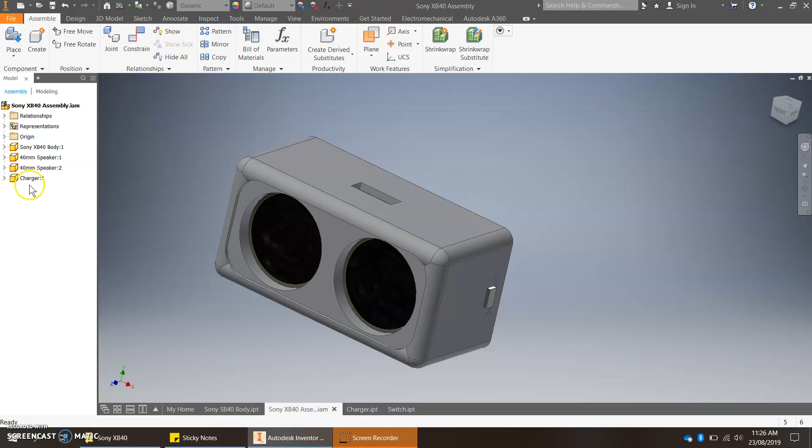So I'll start with deleting out all my parts and pieces and getting it back to the basics. First off, make sure that all your files are saved in the same folder. So from SEQTA, download the charger, the battery, the speaker, and the switch, and put them all in your folder for your work.

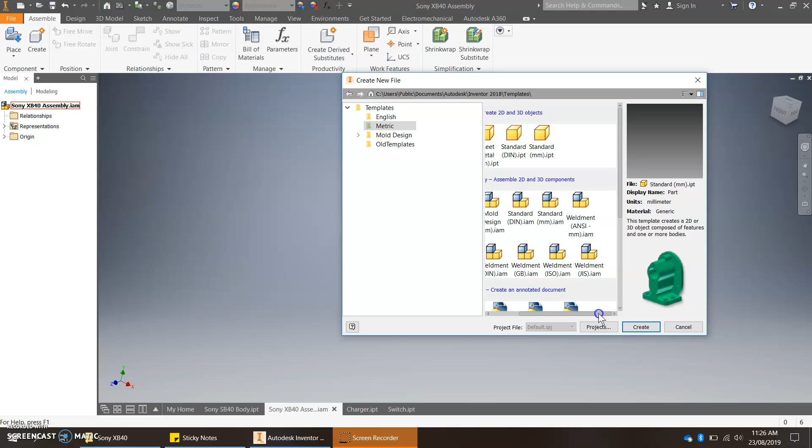Now, we'll start fresh with another piece. So you go File, New, Metric. You want the standard millimeter assembly, so Assembly, Standard Millimeter, and click on Create.

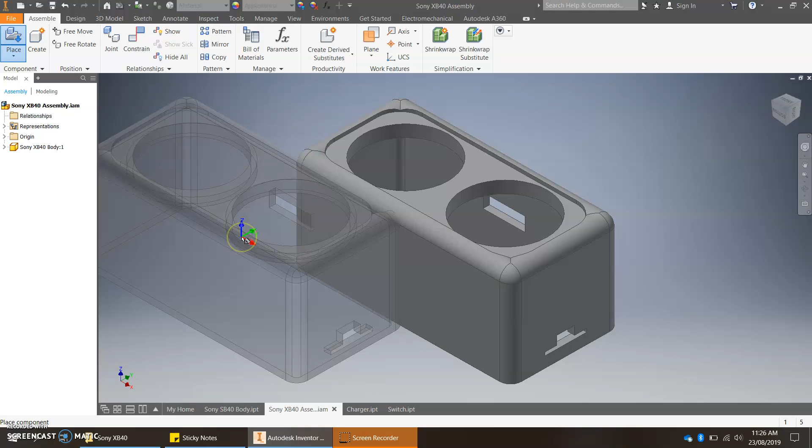Once you're there, you'll click Place. You'll load in the body. Hit the Escape key to stop making more. Rotate your view - remember, rotate view is Shift and hold your mouse wheel down.

Place. Let's next add in the speaker. So I'll click once, twice. Place in next my charger. Place a switch. Okay, when you're done, you hit Escape.

The first part you need to know is called Constrain. So when you select this tool, you're telling it basically what you want it to do.

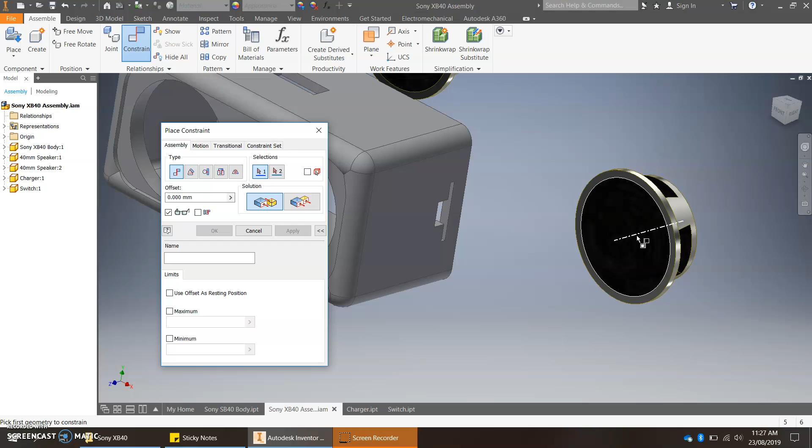First off, if I zoom into my speaker, make sure that you move till you find the center line of the speaker selected - so we're not clicking, we're just moving our mouse. Now I'll click my mouse once, that selects the center line. Move to the center line where you see the center line of the speaker hole, not the edge, but the center line. Once you have that, click on it.

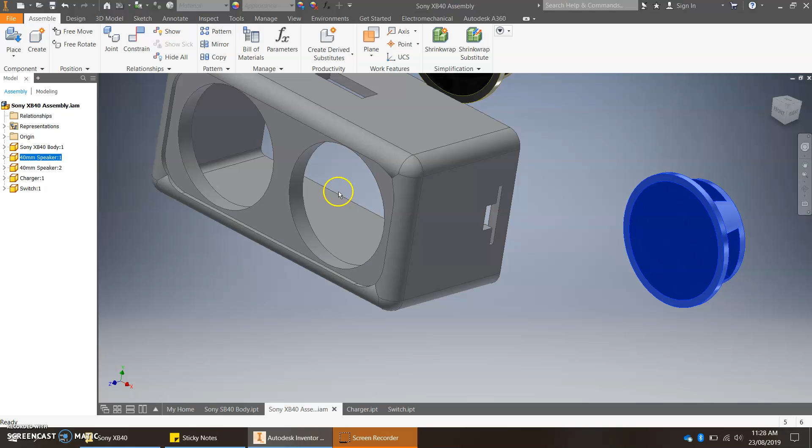If it doesn't pop in the way that you like it and it looks funny, what you can do is click on your item, then click the free rotate tool. Make sure it's rotated till it's kind of similar to what you want. So I want it to look kind of something like this in my speaker. Okay, you click the Escape tool.

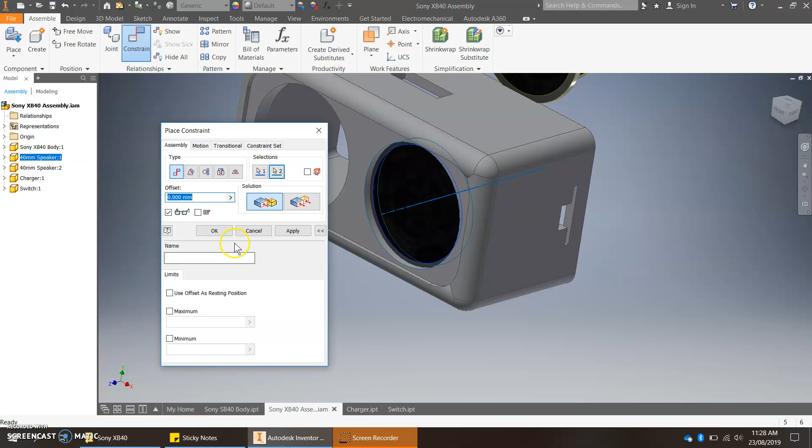Now Constrain - grab the center line of the speaker, the center line of the hole, and then click OK. Now notice once that happens, it's centered in your speaker, but it can move back and forth.

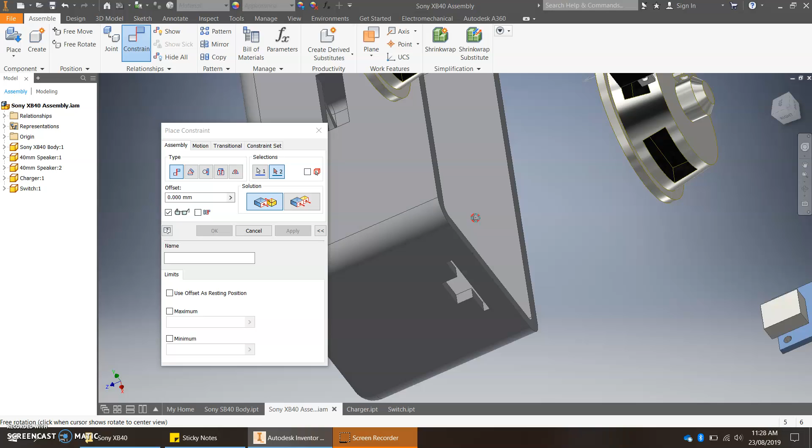Your next step is to click Constrain again, zoom in, select the surface of the speaker that you want to attach to. So if I want this front surface here, I'll click that, and I'll use my rotate tool - Shift and the mouse wheel - and I'll zoom in, and I want to touch the back of the speaker part here. If I click OK, you will now see by dragging this around, it's attached.

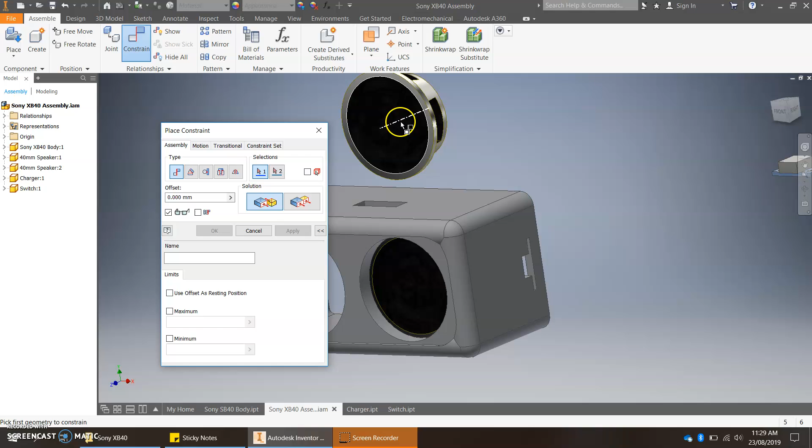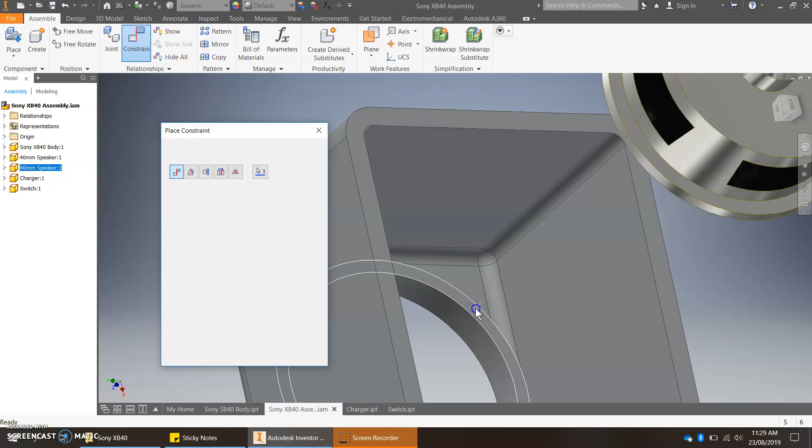So we'll repeat again with this one. Constrain, make sure you select the center line of the speaker, the center line of the hole, and click OK. Drag your speaker back, click Constrain, select the front face, make sure you get this little arrowhead, then zoom around, select the back wherever you want it to attach to that surface, and click OK.

Let's move next to this guy. So I'm going to use my free rotate tool, click on my piece, rotate it to kind of how it needs to look - something like this.

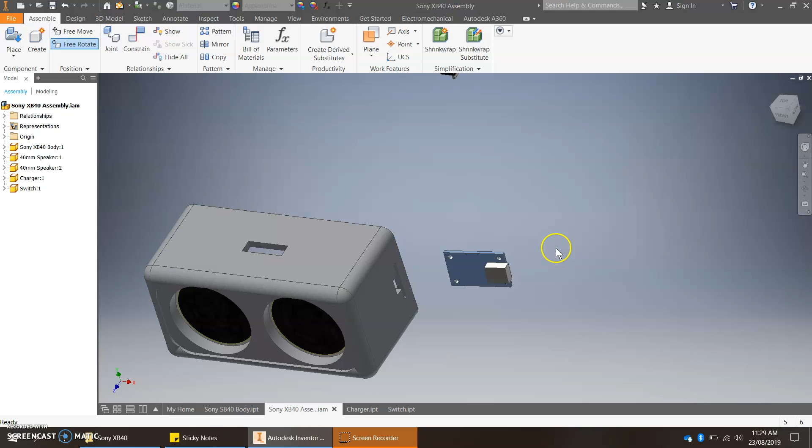Click Constrain. Okay, I would like the back surface of this here to touch the inside surface of this part. Click Apply.

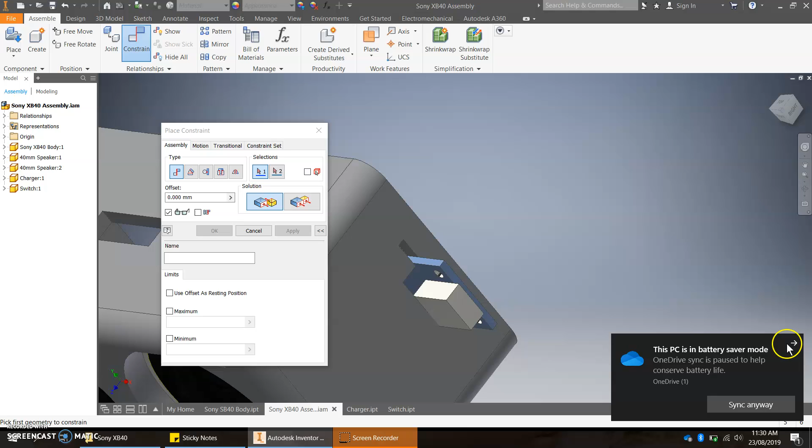The next tool I want to do is select this surface here, the top edge of that bump, and the bottom edge of this surface. See, now it looks correct. Click Apply. Now I would like this surface to touch that surface, but I want them flush.

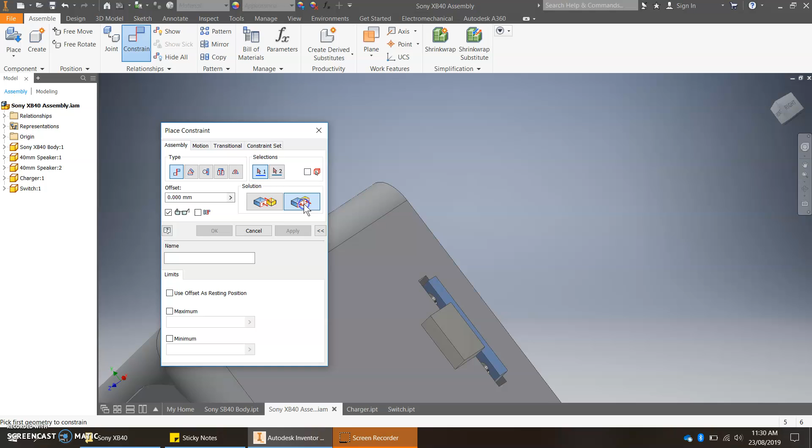So I'm going to switch my tool, click this one, and click these two surfaces. Click OK, and you'll see it's attached inside my work.

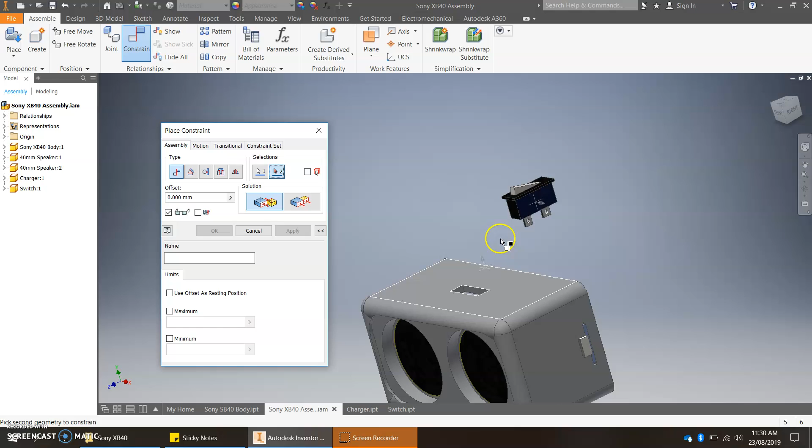Okay, next up, let's work on the switch. So I'm going to go Constrain tool, select this surface here. I'm going to zoom in and select this surface because I want them to touch. Click apply. I want this surface here to touch this edge here. Now moves it down. Click apply.

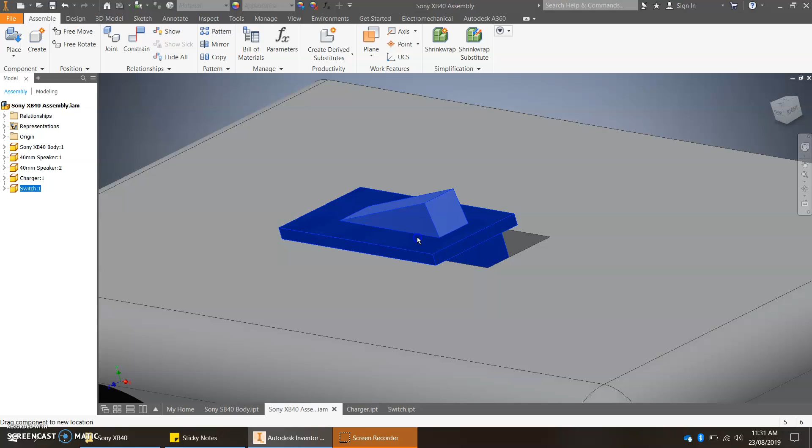Now if I close this out, you can see it's in the right spot, but it can still be moved. So now I'm going to go constrain and select this surface here and this edge, and now it's locked in place.

Now you'll see my part is complete. So now you can make the back and then assemble it onto here. So click save and give it a name.